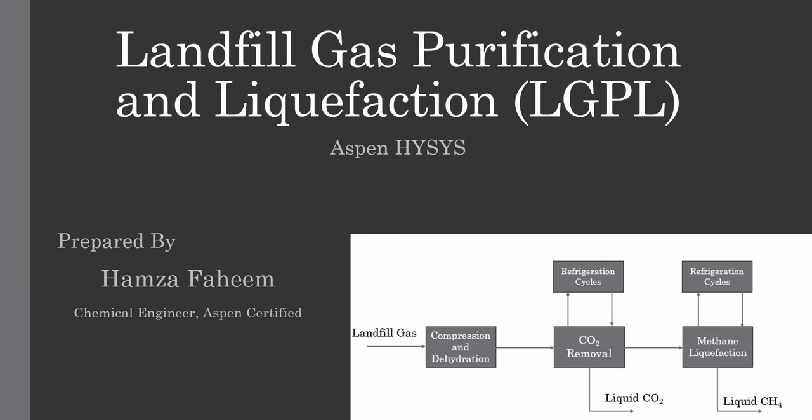Welcome back. In this video, we are going to simulate a process of landfill gas purification and liquefaction. Landfill gas consists of methane and carbon dioxide. First, we will remove carbon dioxide and liquefy it. Then, we will do the simulation of methane liquefaction.

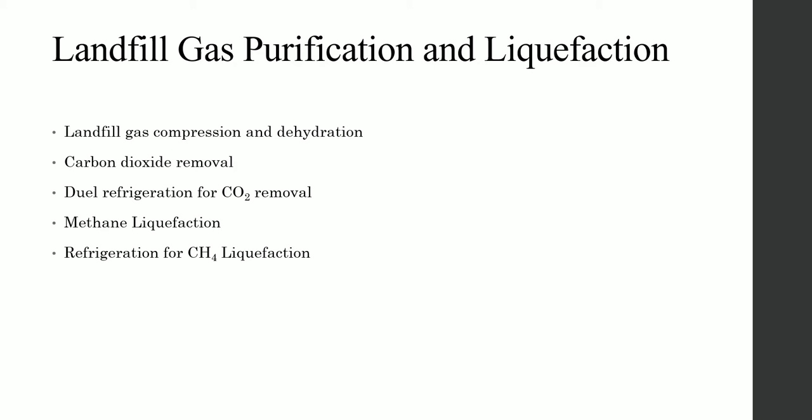This series will consist of 5 videos. The first will be an introductory video with landfill gas compression and dehydration. The second will have carbon dioxide removal, and the third video will be an extension of the second, in which we will simulate dual refrigeration for CO2 removal. Then our main video covers methane liquefaction, and the fifth video will be an extension of the fourth one, refrigeration for methane liquefaction.

So this is the overview of our process, in which landfill gas is first compressed and dehydrated. Then it will go for CO2 removal, in which our product is liquid CO2, and refrigeration cycles will assist this process. In this CO2 removal, we will have cryogenic distillation.

Then our gas, which mainly consists of methane, will go into methane liquefaction. Methane will be liquefied using refrigeration and a pressure drop process, while residue methane will be recycled back into the process. This is going to be a comprehensive process to simulate in Aspen HYSYS. So let's start.